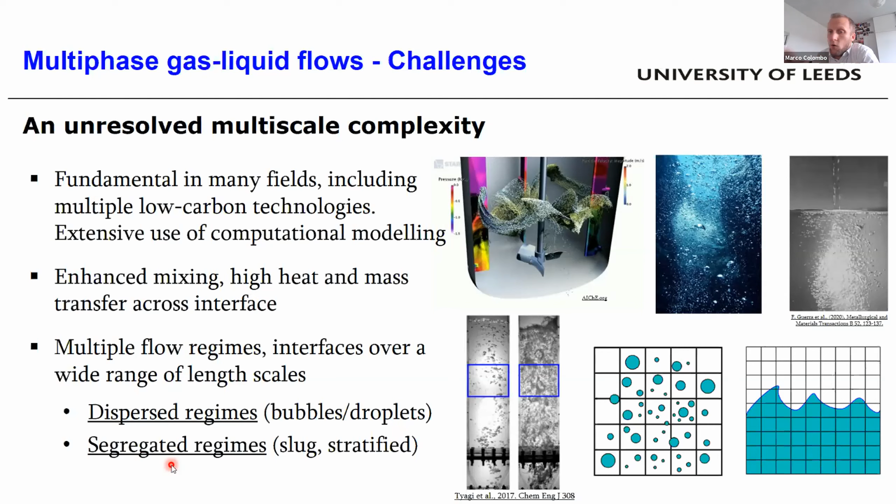the computational models available. Normally, flow regimes can be distinguished between dispersed regimes, such as small bubbles dispersed in a continuous liquid or small droplets dispersed in a continuous gas, and segregated or large interface regimes, such as slugs or plugs of gas in liquid, or stratified flows where two fluids with different density flow in a stratified pattern. In nuclear thermal hydraulics, we probably can find all of these flow regimes. And the additional problem is that most of the time we don't have very well-defined conditions, but a mix of dispersed and large interfaces that coexist in the same flow.

And the other problem is that we have computational models, and they have been successful, but most of the time only on specific flow regimes, and when conditions are well specified, for example, for bubbly flows. And so, considering this, there are great benefits if we are able to develop an all flow regime computational model. So a model that can be applied irrespective of the specific flow regime that occurs, and that can provide enormous benefit to the modeling of boiling in nuclear thermal hydraulics, and also to the modeling of different scenarios that occur during a loss of coolant accident. And so this is essentially the main aim of the research, to try to develop a model that is applicable to all flow regimes.

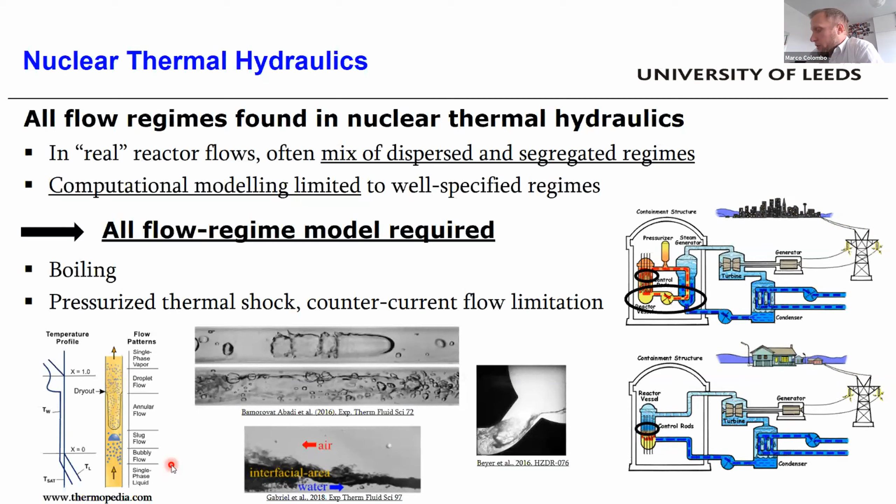This has been already addressed in previous presentations. So what are the most used modeling techniques? We have the multi-fluid model, where the instantaneous field is essentially averaged. So in this case, we have bubbles dispersed in a liquid. After the averaging, we don't have the bubbles anymore. We have what is called an interpenetrating continua model. So the two phases both become continuous in the computational domain, and what we know is the amount of gas and liquid in each cell, so the volume fraction of each phase in each cell. We don't have the interface anymore, and all the interfacial transfer processes have to be modeled.

The advantage of this model is that it's quite robust and can be applied even to large scale flows and complex geometry, and has been successful in some flow regimes. For example, there have been good predictions of bubbly flows, in particular because they can be characterized by the flow of an averaged bubble. But the downside is that it's an averaged model, so we don't have the interface anymore, it is subject to diffusion, and because of the averaged treatment, it is unable to capture large intermittent structures that are common in large interface regimes, for example, slug flow. On the other side, we have interface resolving methods that have been described very well in the first presentation today.

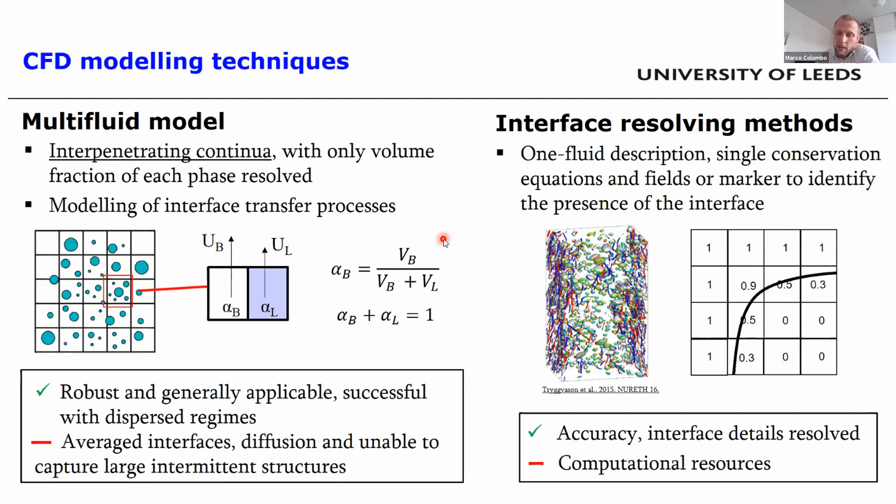So our strategy here to overcome the limitation of the two models is essentially summarized in the model we are developing, which is called Generalized Multi-Fluid Modeling Approach, or GEMMA is the acronym. Essentially, what the model wants to do is introduce in the multi-fluid modeling framework some kind of interface resolving capabilities in a multi-fluid sense.

So it's based on the multi-fluid solver reactingEulerFoam in OpenFOAM, and includes different features. One is a compression term, which is this one that is added to the continuity equation, and that is essentially a numerical feature that counteracts the diffusion that normally affects multi-fluid models. And it is essentially based on this compression velocity that is obtained from the normal to the interface and

the relative velocity. So this is a compression velocity that will act normal to the interface, and also will be modulated by the relative velocity and will maintain the interface sharp, and it will be active only when large interfaces are present. And this is achieved by this scalar field C alpha, which is 1 when a large interface is present, and 0 where instead the flow regime is dispersed.

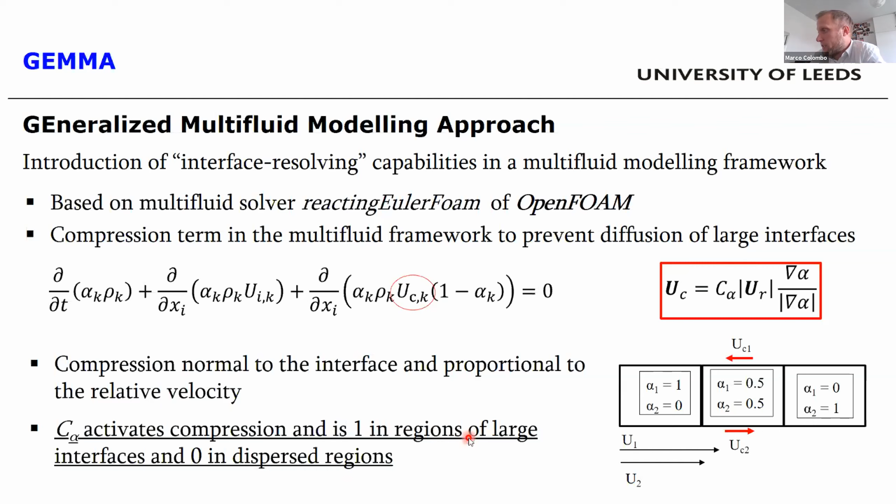Now, since we have that, how are we able to detect if a large interface is present in our multi-fluid field? Well, the model does that in two ways. One is based essentially on the mesh resolution, by defining this local interface resolution quality parameter, which essentially quantifies how well we are able to resolve the interface on the computational grid.

You see an example here. Higher values of that IRQ mean higher resolution. So for this small bubble it is 1, so probably we are not able to capture that. This is 2, for this it is 4, so we may try to capture this interface and also this large interface down here.

And the other parameter that is used is the local size of the dispersed phase that is normally provided by a population balance. So when the local size of the dispersed field is higher than a certain value, then the large interface model does that. And essentially that C alpha field turns to 1, and it means in that region there is a large interface.

So the last step, since we are still in a multi-fluid framework, is to identify the correct closure relation that we want, because the interface is detected, is kept sharp, but still we have to rely on interfacial closure. And what the model does is select the most proper one for the regime that is found there. And we do that by building on top of the blending already available in OpenFOAM. And let's show how this works.

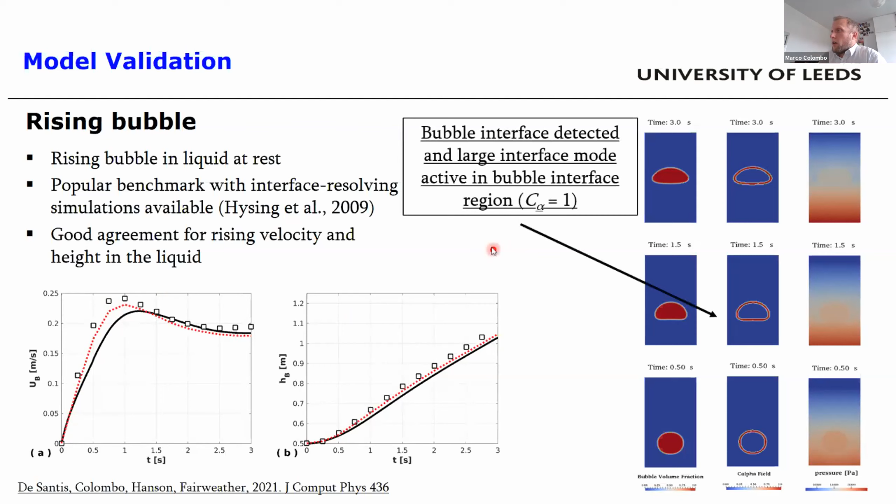We have other additional validation cases that can be found in this recently published paper, but I want to use the remaining time today to present two cases that are more related to nuclear thermal hydraulics. One is a stratified flow, which is important for phenomena such as pressurized thermal shock and countercurrent flow limitation, and also important in the oil and gas field for the formation of slugs.

So we have applied the model to the stratified channel flow investigated by Fabre et al. It is a horizontal channel with water on the bottom and air flowing on top. What has been observed is a smooth stratified flow that becomes wavy and perturbed when the flow rates of the two fluids are increased. This case has been used mainly to assess the behavior of the turbulence model. In general, since the model is implemented in a general way in OpenFOAM, it can work with any model.

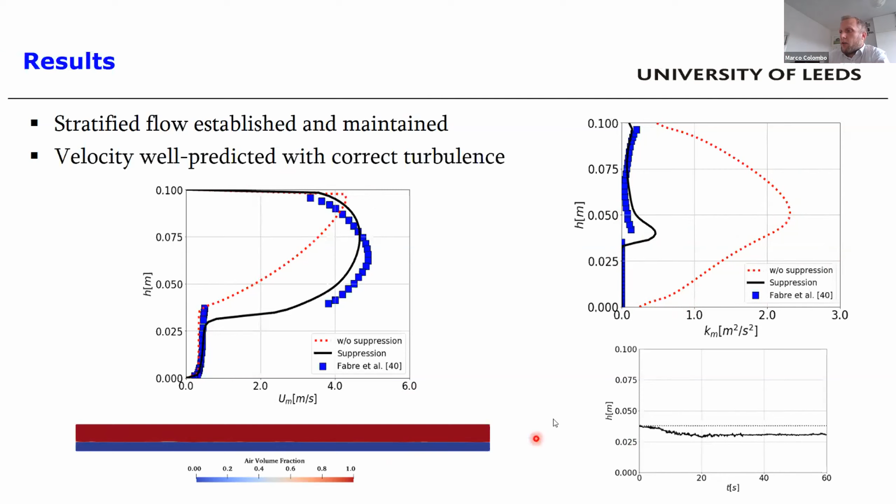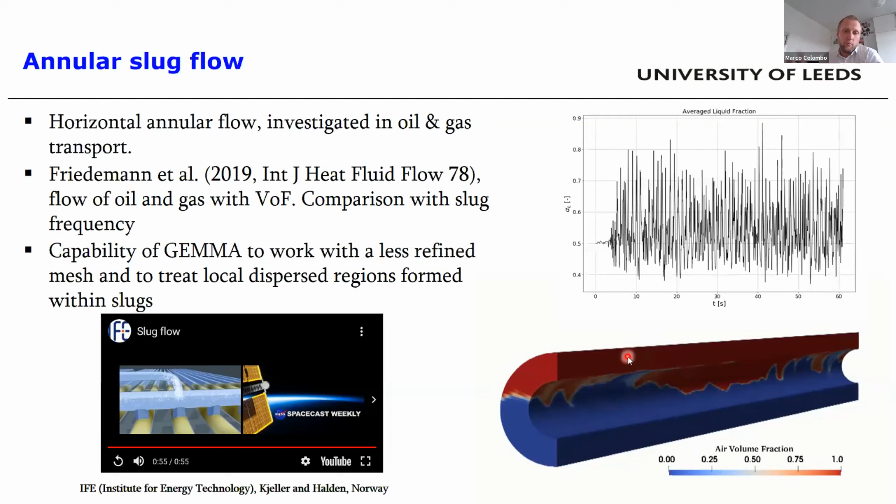And the main advantage with our approach will be to perhaps use less refined meshes, and also be able to more properly model the dispersed part of the domain that is found between slugs. The last results I want to show are for flow regime transition, which instead is more proper in nuclear thermal hydraulics for the modeling of flow boiling, and so of the entire boiling channel.

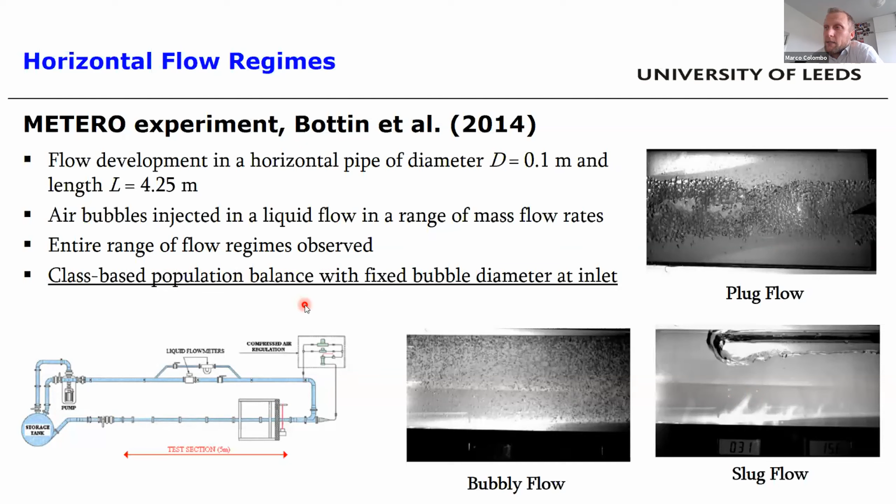And in particular of this experiment here in a horizontal pipe, where the flow rate has been changed to obtain the different flow regimes. So we have bubbly flow, the formation of plugs, and then the formation of slugs in the pipe. And in this case, the model is coupled with the population balance model based on the class method, and is the model already available in OpenFOAM.

So essentially, in the bubbly flow, the model correctly works in the dispersed regime. You see here a distribution of the void fraction. This is the bottom of the pipe. This is the top. Bubbles accumulate on the top, but the model still operates in the dispersed regime. Then, if we increase the void fraction, we go to what is called stratified bubbly flow here. This is an image from the top of the channel. And you see that the void fraction here becomes quite high, perhaps close to 0.6,

but still the model predicts the dispersed regime. If we increase the gas flow rate even more, the diameter will become higher than 6 millimeters due to coalescence, and plugs and slugs start to form. I have an animation of that showing the simulation of the two regimes, the plug regime and the slug regime here. You see that with time, this large vapor structure starts to form. The formation of large interfaces is detected.

This is an example of the C alpha field. For the plug case, you see that it is 1 in the location of the large interface. And here instead, this is the diameter for the plug flow. You see that it is below 6 between the gas plugs and higher than 6 in the gas plugs. That's not important because there is no coalescence happening there since we have continuous gas. And if we increase the gas even more, the model turns to perfectly stratified flow, as in this case here.

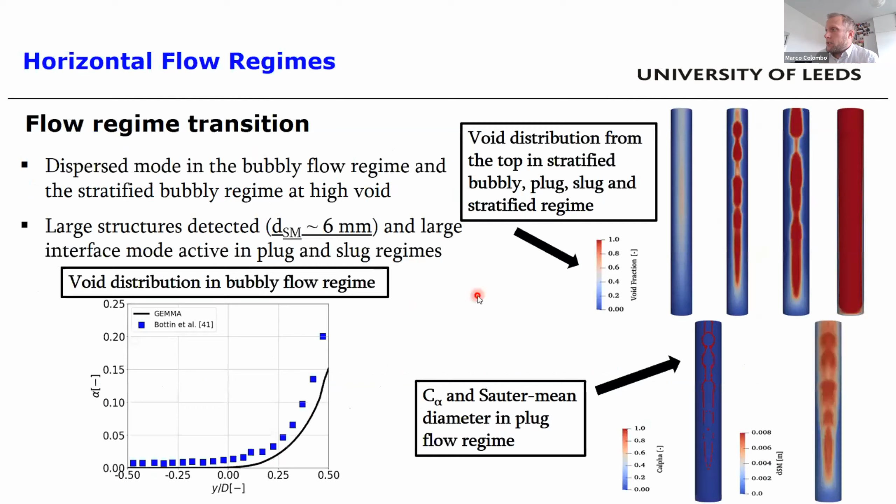Well, it's completely sensitive in the sense that, I mean, this gamma means, let me go back. Can you still see the screen? Yeah. Okay, so essentially it says that we want to resolve that interface when it's higher than the mesh size by at least gamma. So if we say gamma is 1, of course, that will be an interface that is the same size of the mesh, so we won't be able to resolve that. So that is critical and is completely dependent on that selection.

But at the same time, it allows us to say, well, we are not interested in solving 4 millimeter bubbles because we can characterize them well with the dispersed model, but we are interested only in resolving much larger bubbles that we struggle to characterize with the dispersed model. Sure. Okay. But it's a parameter that is completely your choice. Yeah, you can fix it in the simulation setup.

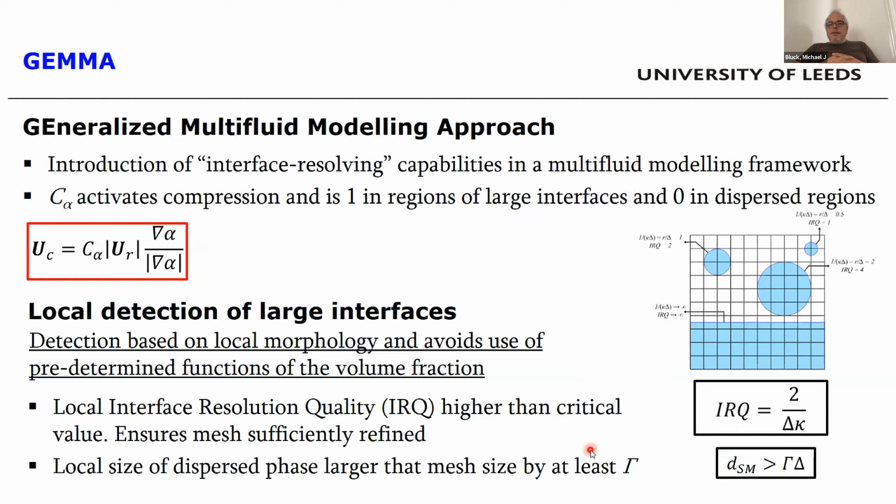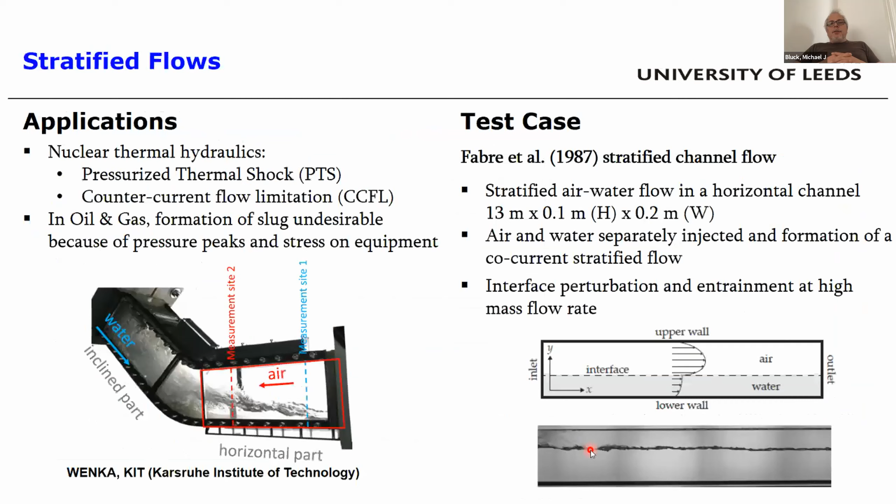And one other thing, you used the K-epsilon model in a later example. Yes. Have you tried it with other turbulence models? Is it easy to? Yes, not in that particular case, even though I have some LES currently. Yeah, not so much in that, but if it was, for instance, a valve or a pump or something, K-epsilon models aren't great.

Yeah, well, it's immediately compatible with the Reynolds stress, for example. Ideally, with all the models in OpenFOAM. I'm not saying that if you switch the model it works, but in principle it's easy to implement. Yes. It will work. Then maybe the model will require additional modeling improvement to work with this particular framework. Okay, thank you.

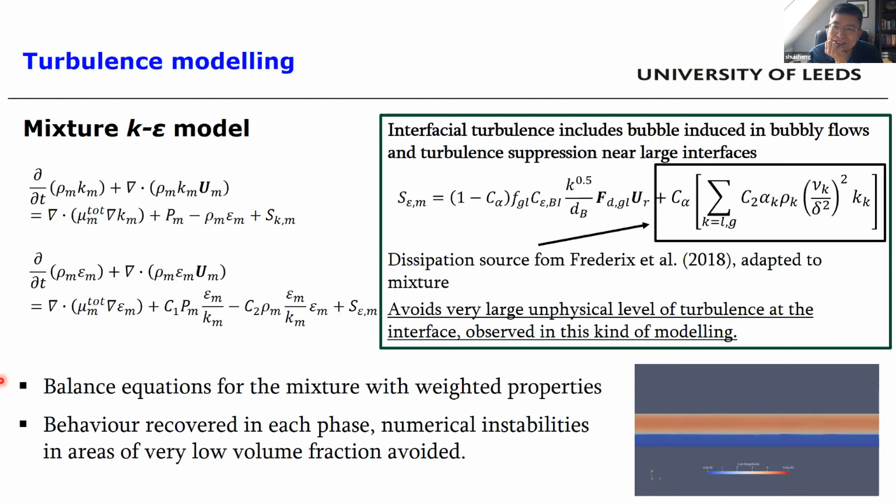So I mean, for me, I think today's talk is really interesting in the sense that I know even for single phase flow, we weren't able to resolve everything. It's actually quite difficult, but now look at what has been done in two-phase flow. They are overtaking simulations of single phase. I'm wondering whether, in any case, even if you go for DNS, there will be a lot of

modeling involved. Even for the same global configurations and conditions, the flow behavior can still be very different for different surface conditions, or how long the same test has been running, for how many hours. As a result, the surface conditions have changed, and then everything else probably has changed a lot, which means whatever you do, you still have to include a lot of calibration or modeling in it. Does that make sense? Yeah.